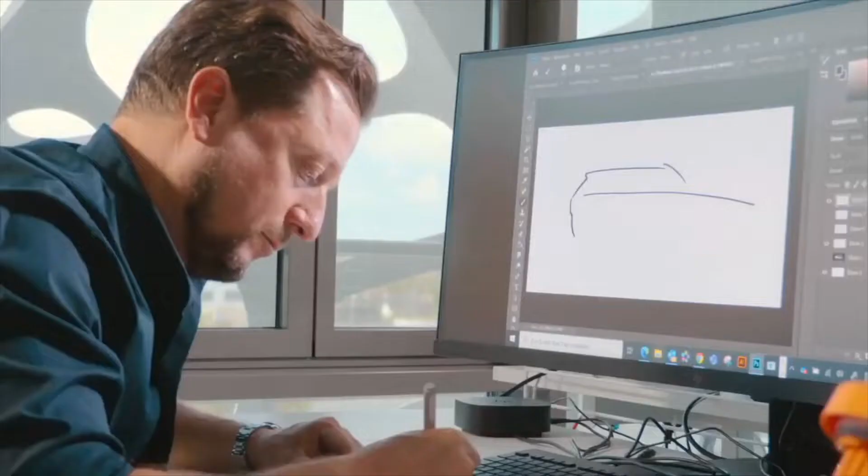Let's change the automotive world forever, creating something that has never existed before. Taking on new challenges in eMobility for a brighter future and a cleaner planet. We can work together to innovate practical solutions, to meet ambitious targets of today and set the trends of tomorrow.

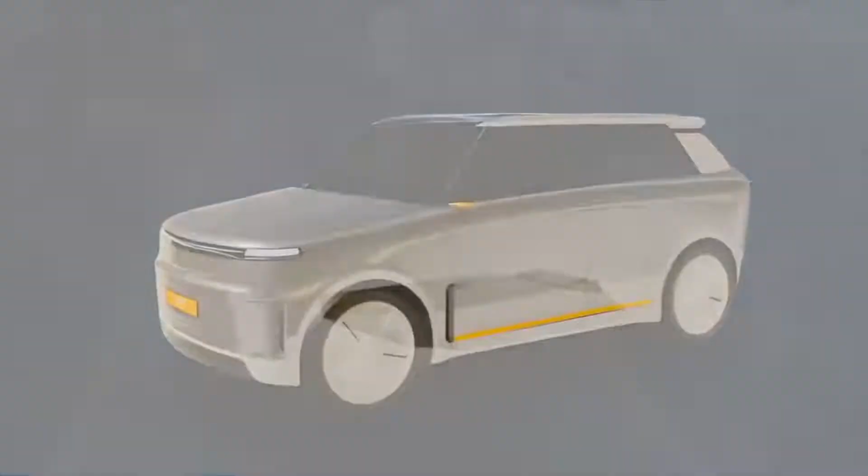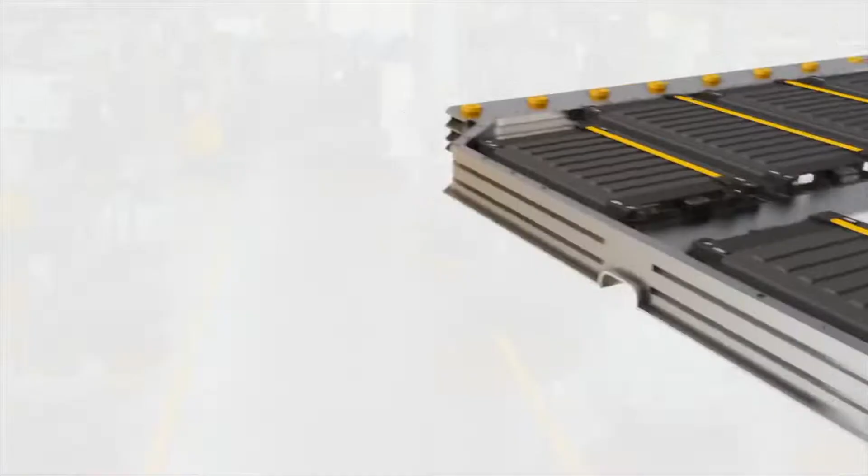We support you, deliver highly efficient battery components and charging infrastructure designed for long-lasting performance, from flame-retardant plastics in durable orange to thermal management and solutions to reduce noise, vibration, and harshness, safety and durability that make a difference.

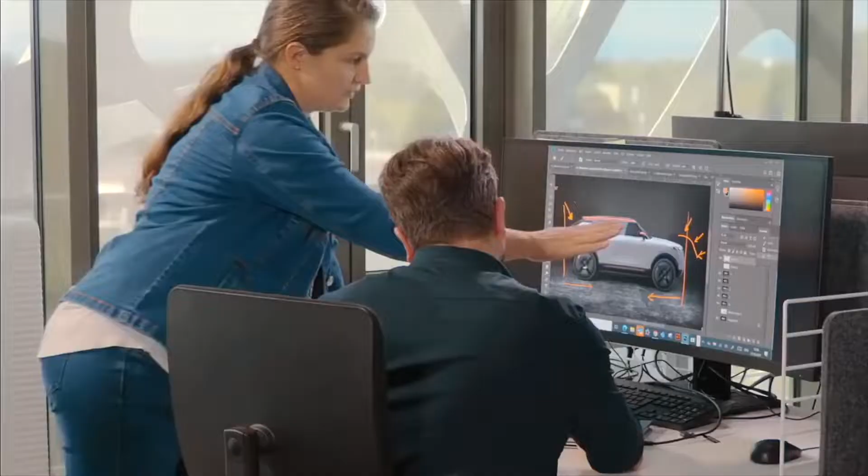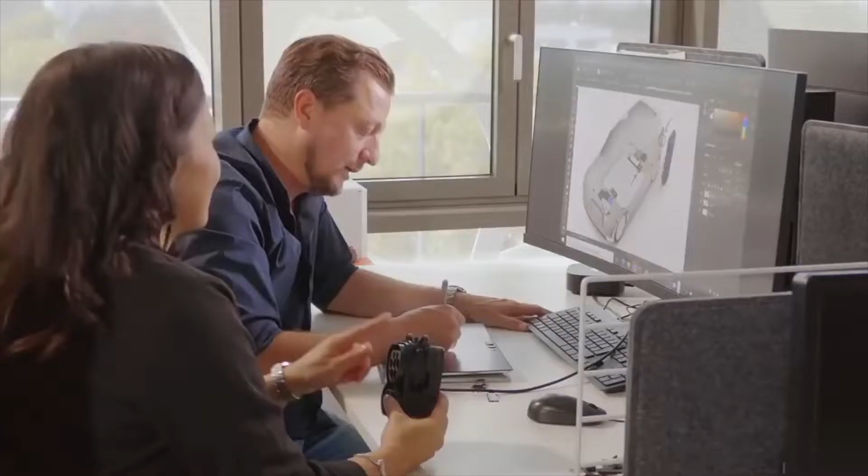Materialize your eMobility ambitions. Freedom to design with high-performance plastics and technical expertise to launch market-ready products, from concept testing to serial development with BASF. Your automotive concepts become reality, built to meet specifications and expectations. Together, we can inspire innovation and deliver on the promise of eMobility worldwide.

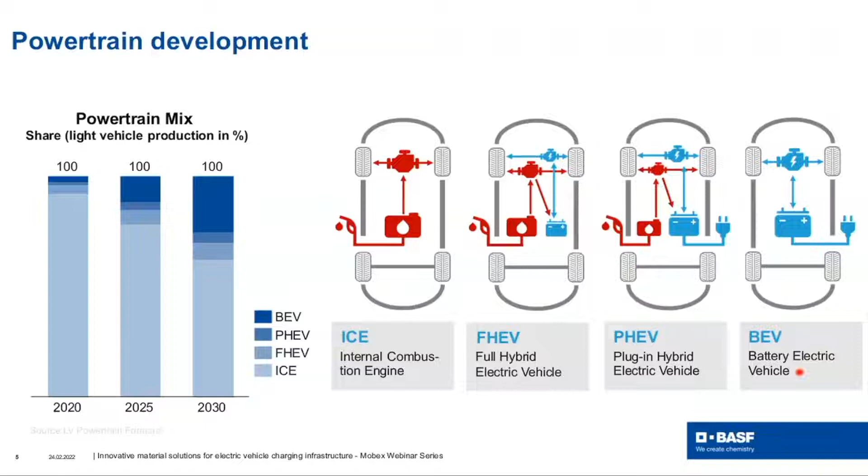Therefore, more or less three technologies are common. One of these technologies is called the mobile charging system. This is what you typically have in your car. It's a mobile device. You could take it wherever you want to drive. You just need a plug and a power supply, and then you could charge your car.

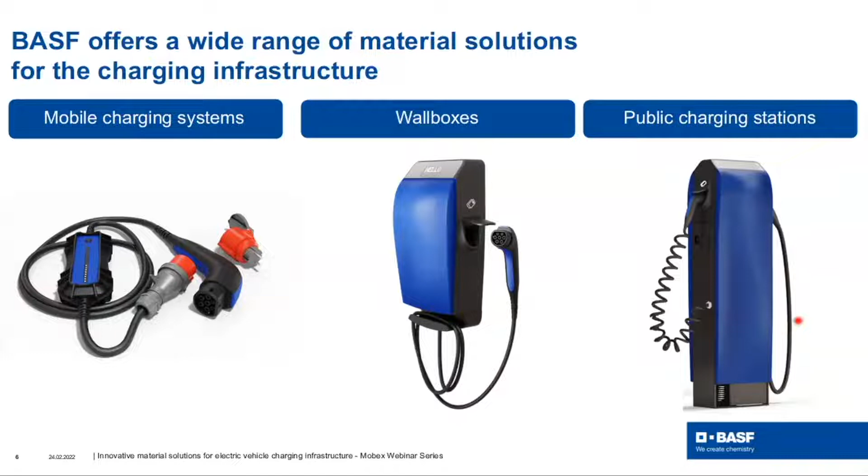If we look a little deeper at the differences of these three charging technologies, the power supply of the mobile charging system is normally AC, and the Wallbox is also normally covered with AC. Public charging stations, depending on their energy level, are covered with AC or DC. This affects the charging time. The mobile charging system has the highest charging time, so it takes very long to charge a car. The Wallbox is a little bit faster, but still needs a lot of time. The public charging station, depending on the power level, leads to much shorter charging times.

This is something we also see in installation costs. A mobile charging system is very flexible, mobile, with fewer components and less complexity. Therefore, the installation costs are quite low. A typical Wallbox still has low installation costs, but they are higher compared to a mobile charging system. We need several components, and therefore it's higher.

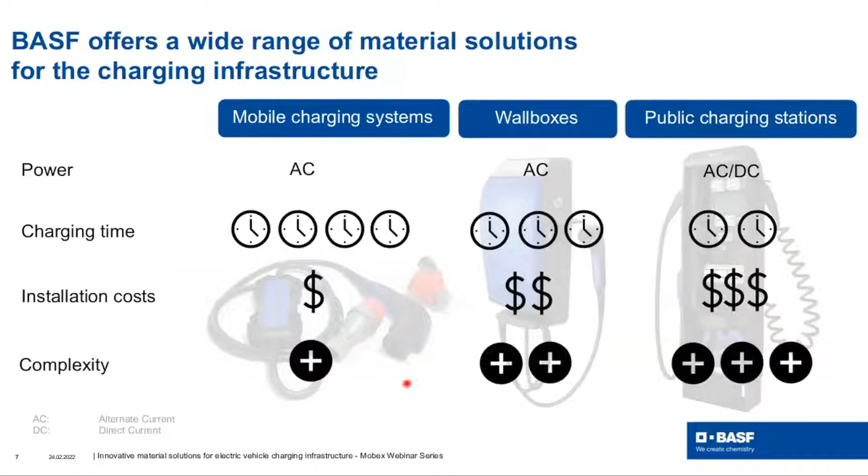So with that, I would like to hand over to the next question. The question is really, what kind of components and requirements do we have for these kind of charging systems? Here, I would like to start explaining this with the central part here, the Wallbox.

If we look at a typical Wallbox, we normally see several components. One component here is, for example, the display, but also the cover is a very important component, especially if we talk about optics, or other requirements like flexibility. We also have a charging cable, and for sure the loading gun, which belongs to the Wallbox. And for sure, not to forget, also the housing.

If we look in a Wallbox, we also see different important parts like breakers, switches and all the individual safety components. But also parts like the mounting bracket, which is not visible from the outside, play an important role in the Wallbox setup.

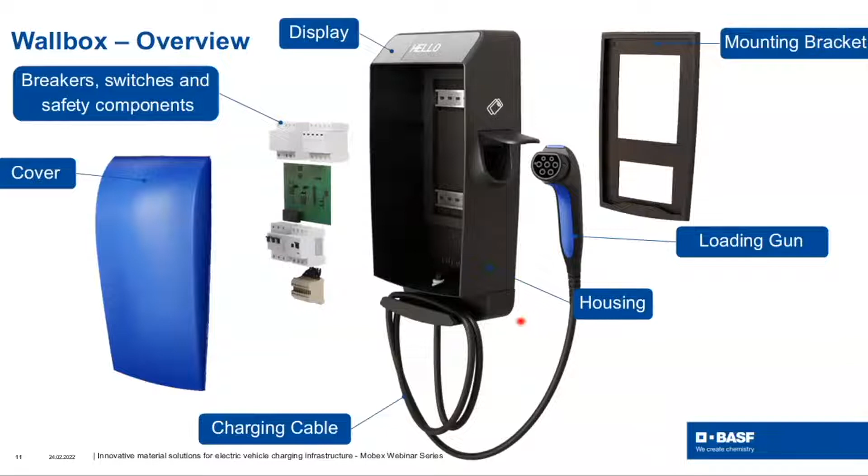And with that, I would now like to show you a few more components in detail and talk about the requirements in detail. If we take, for example, a Wallbox cover, which you see here highlighted, we have one innovative material solution to offer. This is called Ultramid Deep Gloss. With Ultramid Deep Gloss, we are able to realize high gloss inserts without any additional painting.

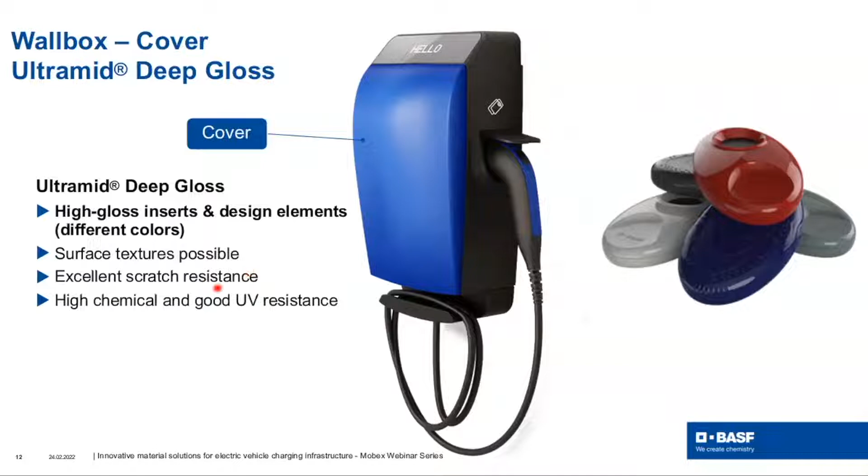You see here on the right side a demonstrator part out of our Technicum. We realized that in several colors. This part really comes without any additional painting. If we look also at other properties like surface textures, scratch resistance, and chemical resistance, this is one material we could offer to solve all these issues.

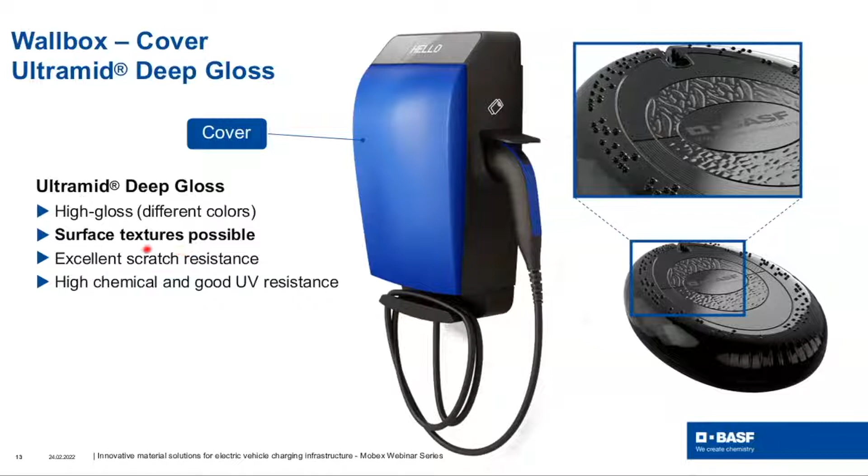Especially regarding surface textures, we see in this demonstrator part that we are able to realize different surface structures. For example, you see here the BASF claim, but we also have these bubbles highlighted. So we could really realize different surfaces in one part with one material. And as I said, also important for these kinds of applications: excellent scratch resistance and good chemical and UV resistance.

If we now go to another part, for example the display, we also have several material solutions to offer. The material I would like to show today is Ultramid Vision. With Ultramid Vision, we have a semi-transparent PA6 grade, which also has a high scratch resistance and good chemical and stress cracking resistance.

You see here on the right side that this material is semi-transparent. We are also able to offer it in different light colors, so you could really fit the material to your Wallbox design. As I said, we also have chemical resistance and good stress cracking resistance, which is an important property for these kinds of applications.

And especially for that material, we also have the UL94 V2 listing in terms of the UL94 test, but in combination with the hot wire ignition test and the high current arc ignition test, we are also able to achieve a V0 rating according to UL746C. This is a very important property of this kind of material if you require a UL746C V0 rating.

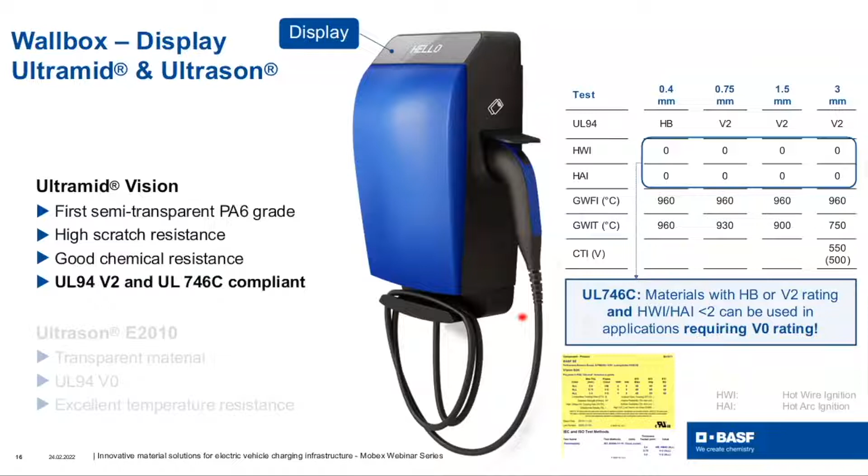So these were, let me say, more design-driven components of the Wallbox. And with that, I would now like to hand over to my colleague Andreas, who will give you more of an overview of the structural components of the Wallbox. So thank you, Patrick, for your introduction.

Patrick gave us more hints regarding design, what we can do to make our Wallbox unique. I want to give more of an overview of how we can install the Wallbox, what is on the inside, and how we can connect it to the car. And at the end, what happens in the car? Are there any parts we have to take care of when we talk about charging? So let's start with the housing.

When we talk about the housing, it is very often the case that a standard material is fine. So you can use, for example, a PBT, which is not flame retardant. Very important are the mechanical properties, but processability is also important. If you have further requirements regarding flammability, you can also use polyamide 6 types with flame retardancy.

Again, here we have the UL746C. We have non-halogen flame retardant additives. And we also have here the yellow card. We see again there is a good PLC listing, especially when we talk about the high amp arc ignition, and the V2 listing we have at 0.7 millimeters.

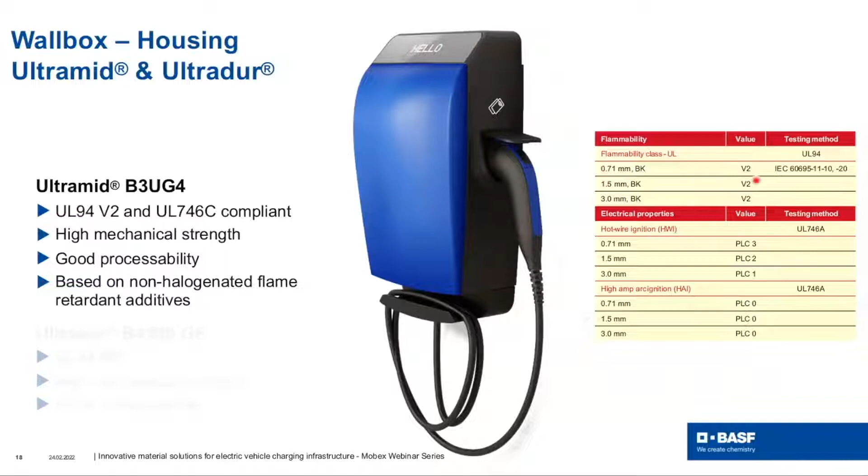When we talk about how to connect the Wallbox to the wall, we have the so-called mounting bracket. For such a part, it could be very important to have a low warpage behavior. This makes it much easier during the assembly process. Then we also have another requirement when we talk about Wallboxes: the glow wire flammability index. This should be above 650 degrees Celsius.

But why is it important? The background here is that if you load your electrical vehicle, you need several hours. And of course, you do not sit next to it. Maybe it's in your garage, in your house, and you will not sit next to it. And so the Wallbox becomes an unattended household appliance. And for unattended household appliances, the glow wire performance is always very important.

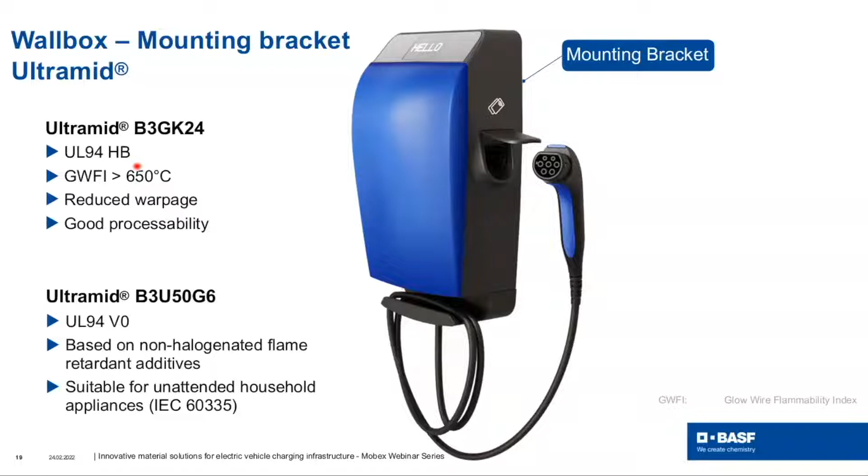If you have some more challenging requirements regarding flammability, we can also talk about a V0 grade. In this case, it's a polyamide 6 with 30% glass fibers, the so-called B3U50G6. This product was especially developed for unattended household appliances and fulfills the standards for IEC 60335. So that means it really has excellent glow wire performance.

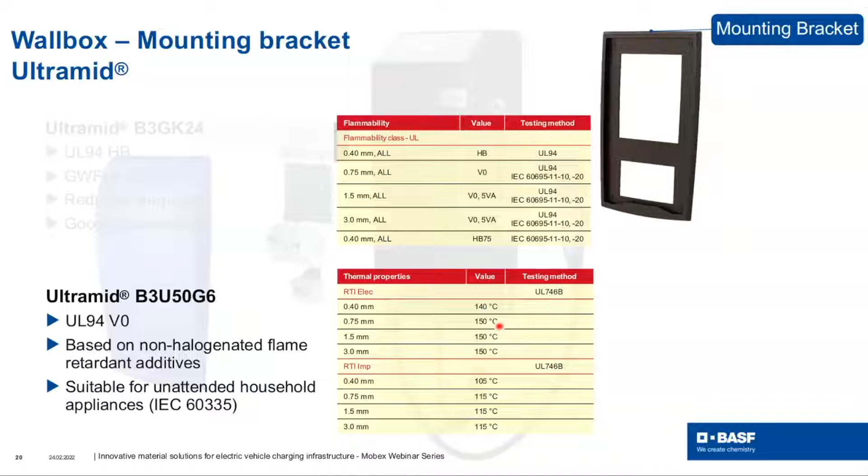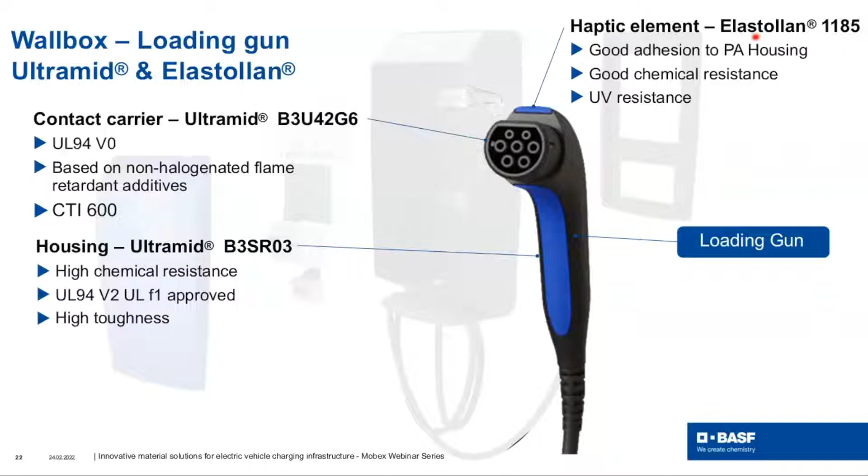Patrick already mentioned different design products where you can make your Wallbox unique. We have something similar when we talk about a loading gun. We very often have some haptic elements, which are here in blue on a loading gun, and therefore you can use some TPUs. TPUs are our Elastollan grades, and especially for the loading gun, we can offer the 1185 series. We again have a good UV resistance, and in general, the Elastollan types have a good adhesion to polyamide, which at the end, of course, is important to have a good and safe product.

Coming now to the inner part of a Wallbox, here we talk about different safety components, switches. It's a bit similar to a switch box you have at home. So you also have breakers and switches at home. And at the end, you can also use similar products for these applications. I do not want to go into detail on every product here. What we have is Ultramid B, that's our polyamide 6. We have different flame retardant additives.

We have Ultramid A, it's the polyamide 6.6. And what is new here in this presentation is the Ultramid C, C3U in this case. This is a polyamide 6/6.6. This product is unreinforced, so it has a high toughness and a V0 rating at 0.4 millimeters. All these products fulfill the requirements according to UL, IEC, CCC, and so on. So there's really a big product portfolio you can play with. And here we invite you to contact us so that we can discuss your project when we talk about safety components, breakers, and so on, so that we can offer the right product for your requirements.

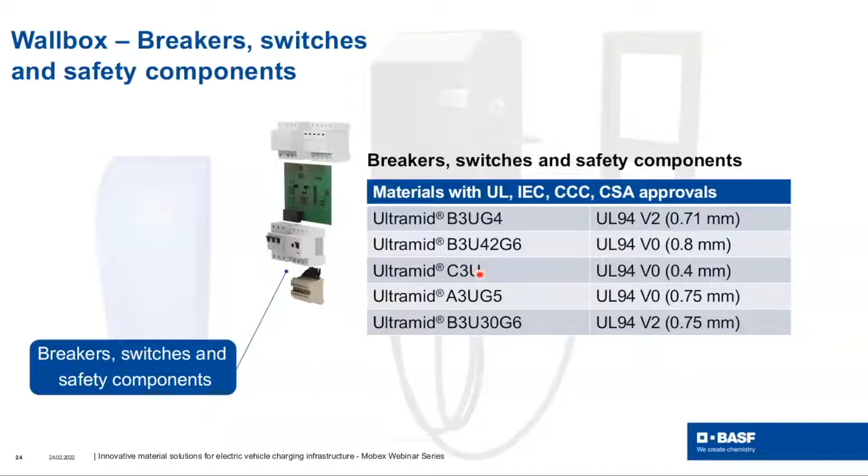So closing the topic of Wallbox, I'm coming to the public charging station. This will also become more and more important in the future, especially when we talk about fast charging. So that is direct current, DC fast charging. What does a public charging station look like?

We have some further components in it, for example, the smart meter. This is important for you, so that you know what you have to pay after the loading process. We also have some tubes in it, especially when we talk about DC charging. Some heat will be generated due to the high power, and you have to cool down the systems.

And for the coolants, you need some tubes. Here we also have different products for the extrusion process in our portfolio. We have the loading gun again. The loading gun looks a bit different to the loading gun of a Wallbox. We have again the contact carrier for the AC part, but in addition, we also have the contact carrier for the DC part. So that is different.

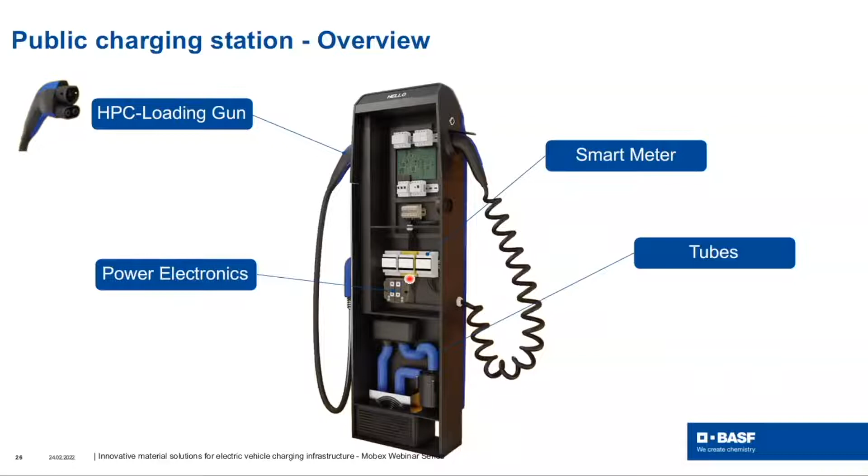And what we also need, and that is what I want to focus on the next two slides, is the power electronics, the so-called IGBTs, the converters we need for DC charging. When we talk about the power electronics, of course, we need a good electrical insulation when we talk about AC or DC. Also, a high RTI value is of advantage because we will generate some heat due to the high power. Constant dielectric strength also is very good to have.

We can also offer some products regarding thermal conductivity. Sometimes there is a risk of hotspots, and then it could be a benefit if you use a product with a thermal conductivity which is higher compared to standard materials. We can offer a product where the thermal conductivity is 3 times higher compared to a standard product.

And one very new and very challenging requirement is that we recommend to use products with very few free ions in. The reason is if you have DC currents, the power goes always in one direction. And if you have now too much of these ions, which are free in the polymer, they can start to move from one direction to the other, and at the end, it can lead to electrical corrosion. And if you have electrical corrosion, you will have an unreliable system at the end. So this is something you should avoid.

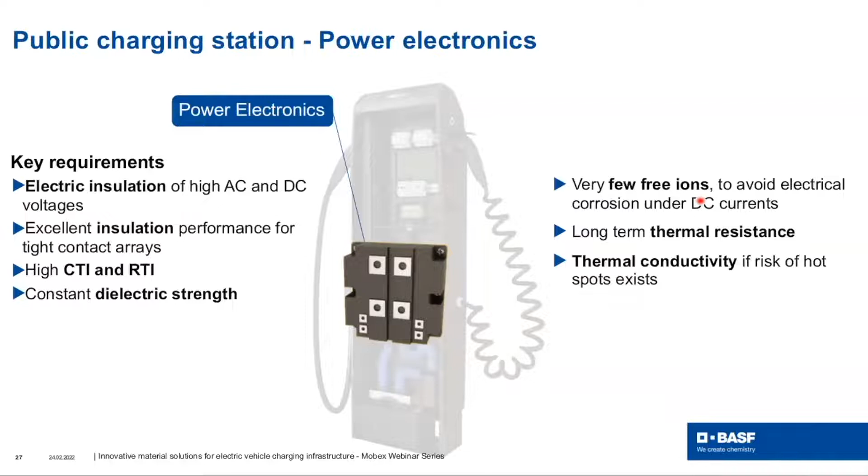Therefore, we developed a product which I want to show you on the next slide. This is the so-called Ultradur B4450G5. It's a flame retardant product. It's available in black and in uncolored. And we did 2 tests for it, and I want to show what we did. First one was the corrosion test.

What we see is the material out of the electrical contact. In this case, it's copper or brass. We took it in a glass, added some pellets to it, added some moisture to it, so some water. We closed the glass and then we stored it in a chamber at 70 degrees Celsius for 55 days. After 55 days, we took it out and had a look on the contacts.

And what we see, if we use the pellets out of a standard flame retardant PBT, is that there was really a heavy corrosion on the metal contacts. This, as you can imagine, will lead to unreliable systems. But the picture looks completely different if you use the B4450G5. So nearly nothing happened on the electrical contact. So this is how it looks after the storage when you use the right product.

The second test we did was regarding deposits. It's also quite a big challenge, especially with flame retardant additives. If you have flame retardant additives in your product, there is the chance that some of them come out. Then they go down to the metal contacts, and you have a deposit on it. With this deposit, the electrical resistance will go up, so the power will increase, the temperature will increase, and you have, again, more deposit, and so on and so on.

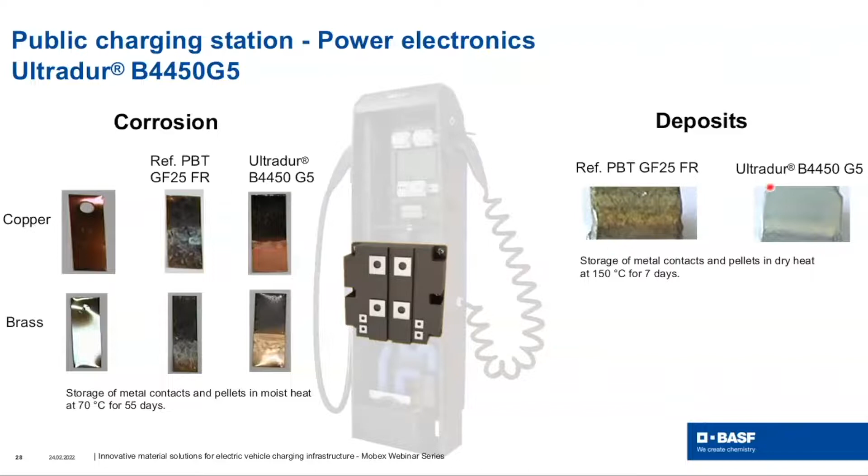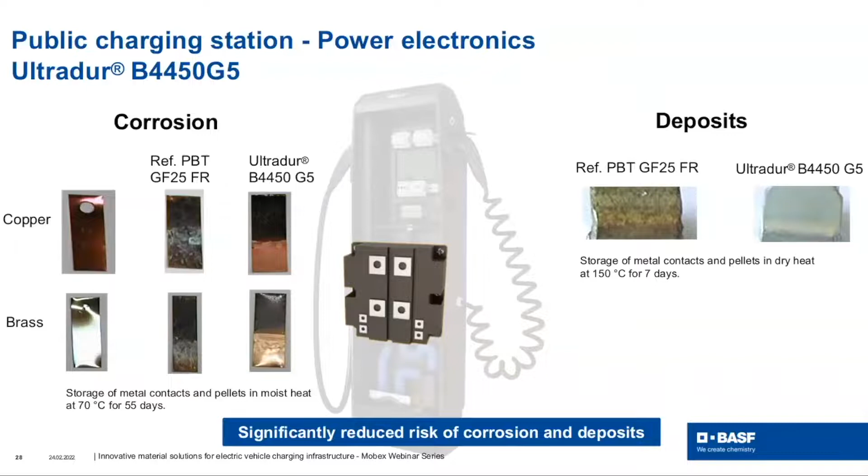And to avoid this, we also did a very simple test. We stored the metal contacts together with the pellets of our product at 150 degrees Celsius for 7 days. And then we had a look, and we saw that with the standard flame retardant PBT, we have a deposit on the contact, and we do not see it when we use the B4450G5. So for both tests, you can really have an advantage using this product, and you will have a significantly reduced risk of corrosion and deposit.

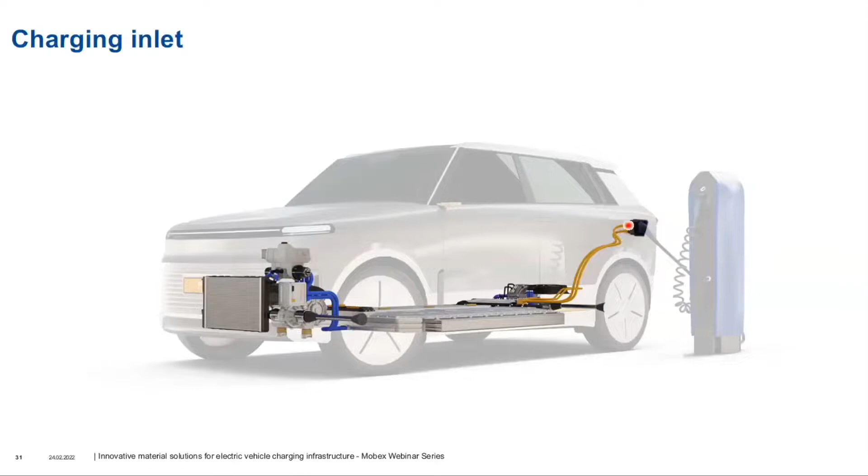So that was the charging infrastructure, but now we want to go to the car: are there also some parts in the car we have to take care of when we talk about charging? So when we have the cable connected to the car, then as a next step, we have the charging inlet. So let's say that's the entrance to the car, and behind the charging inlet, we have these orange high voltage connectors together with the orange cables to distribute the power in the car.

Starting with the charging inlet, we have some similar requirements as we already had at the charging gun. We again have high mechanical strength. We have again the UV resistance. Again, it takes several hours, and during a sunny day, it's better to have a product with a good UV resistance. And of course, also a high CTI is of advantage.

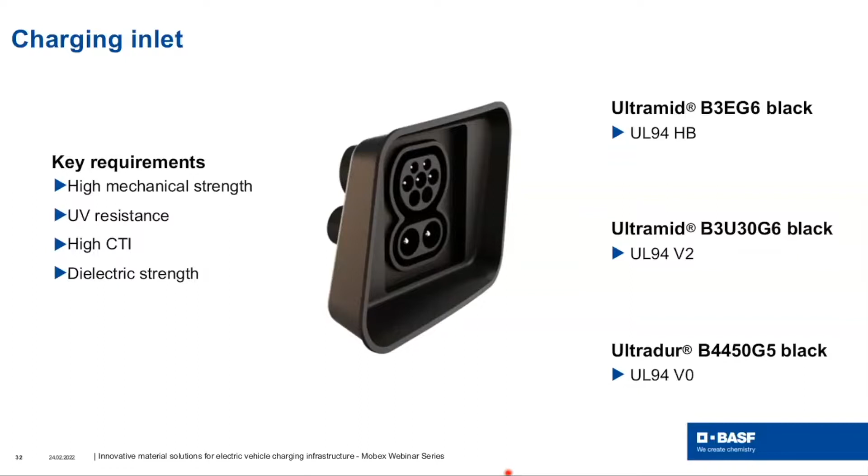This part, also similar compared to a charging gun, is made out of different parts. So you can use different products. We can use a polyamide 6 with 30% glass fibers, B3EG6, for example. We can also use B3U30G6. This is a flame retardant product with a V2 classification, a good UV resistance. And again, especially when we talk about DC and the charging inlets, the B4450G5 could be a good choice here.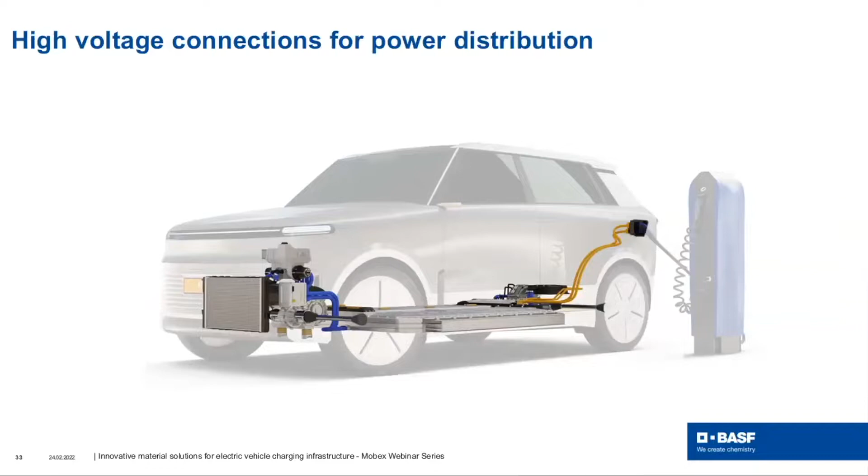Coming now in the car to the high voltage connectors to distribute the power in a car. Here there is a new challenge coming with us. We can use different products. So at the end, you can use Ultradur, that's PBT. You can use Ultramid, which is polyamide. This is up to you. It's up to the design and the defined requirements, also from the OEM. We know that there are HB materials in the market, and we have V0 materials. CTI is important. The hydrolysis resistance is important, especially when you talk about PBT grades for such an application.

But what is new and quite challenging also for us as a material supplier is the color orange. It is not only that you have to make it in orange, you also have to stabilize the product so that it is still orange after a heat aging process. So we developed several PBT grades some years ago. We have two different types. Both are hydrolysis resistant. This is what this HR means. And this one is the non-flame retardant product.

And you see at 130 degrees for 1000 hours, there is just a very slight change in color. So there's still a nice orange, which is important due to safety reasons, so that you see there is high voltage behind. So as a signal color, it's important to have this orange also after heat aging. You can also use an FR modified PBT, the B4450G5HR. It's also available in orange in this case. And also here we can see that after 1000 hours at 130 degrees Celsius, we have still a nice orange.

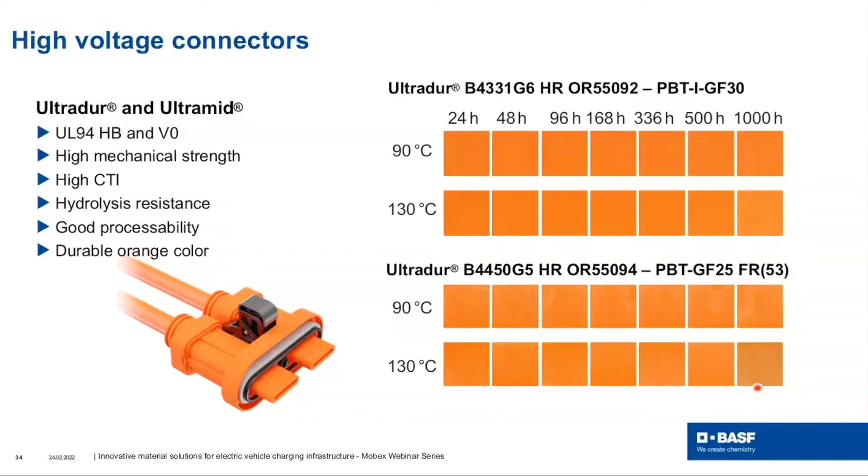Having said this, having developed this product, we also know that in the market, we need an Ultramid, so a polyamide for this application. It is much more challenging compared to the PBT to achieve the color stability. Because in general a polyamide 6,6 after heat aging turns brownish. That is very typical for polyamide 6,6. Here we can see it at 90 degrees. It is still okay. At 130 you have a brown and you have a really dark brown when we talk about heat aging for 1000 hours at 150 degrees. So this was for the uncolored product, which is not stabilized.

We have, of course, more or less the same picture when we talk about the orange product, which is not stabilized. So it's not enough to just change the pigment so that you have an orange grade. You will lose the orange color if you do not use the right base polymer. And this is what we did in our latest development. What we can see here, these are the latest developments. The first one is the non-flame retardant one. We developed it in two different glass fiber reinforced grades.

And we also have here the A3U44G6DC. DC stands for durable color. This is the flame retardant one. We have the V0 listing at 0.4 millimeters. The yellow card with the generic RTI values is already available. And we also have samples for molding trials available. When we have a look at the aging, on the color, we are at least at the same level as the PBT grade. So this is really a great achievement. And so you can now use PBT or polyamide, and both products show a good color stability.

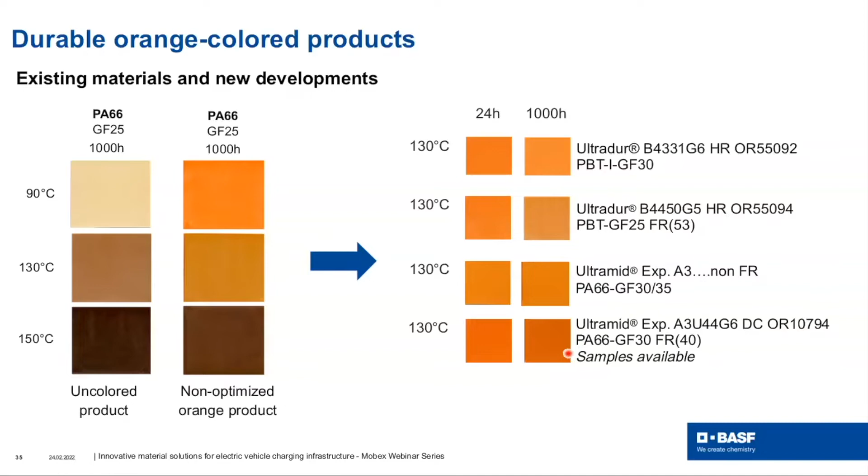To summarize the, let's say, 30 minutes: we have the electrification in the automotive industry, and this will influence the whole market when we talk about cars and so on. When we talk about e-cars, it's also important to talk about the charging infrastructure, because we can do this transformation only if we also have a good charging infrastructure. We as BASF can offer products where you can combine design aspects together with a really good chemical resistance. We can offer a broad portfolio of flame retardant products. For all of our flame retardant products, we have a yellow card available. And in addition to that, we also have different yellow cards available for non-flame retardant products.

When we talk about fast charging, so about the DC charging, we have to take care about the electrical corrosion. So these are some new challenges. And when we want to distribute the power in the car, we need this orange color. And also for these orange colors, we have different grades available.